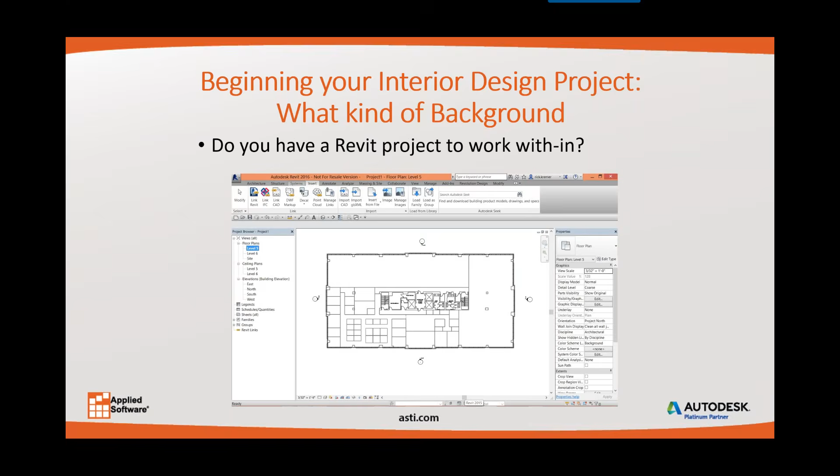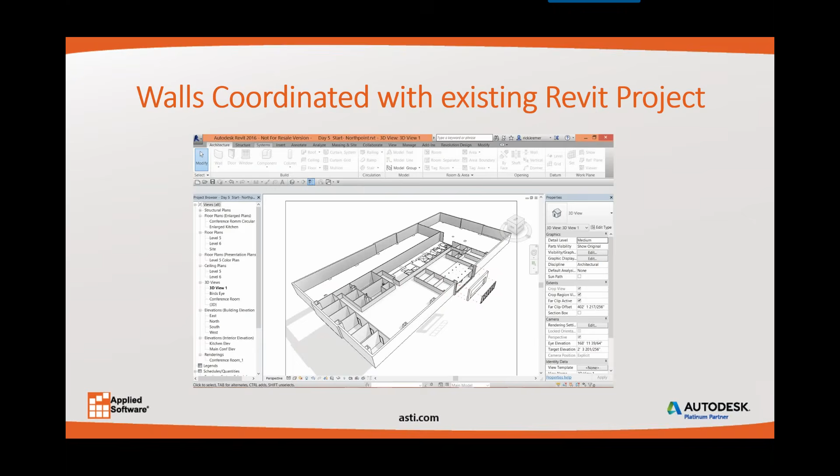So the first thing that always comes to mind when I teach this class is, do we really need to do everything in Revit the first project? And I'm going to say no. You can begin your project work by working in different options. In this case, what kind of background do you have? Do you have an AutoCAD background, or a Revit file? If you're using a Revit file, you're going to have the greatest flexibility on designing. If you're working with Revit files, your drawings will already be well coordinated using those existing Revit projects.

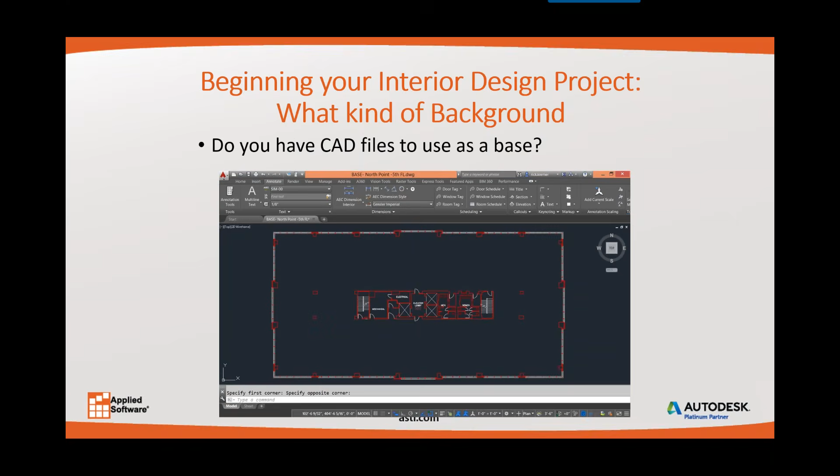Now, if you have AutoCAD files to use as a base, you can simply look at, for example, this AutoCAD background that we've received, and this is actually the file that we look at in our class. So what we start to do is begin to trace over the CAD file. Now this is really, really quick. What we do is we use the pick line tool within walls to import that line work into Revit walls.

So on the left-hand side you see the stairwell, and all we did is just use the pick lines. That has to be hands down my most favorite feature in Revit when we're converting CAD files to Revit. And the results are on the right.

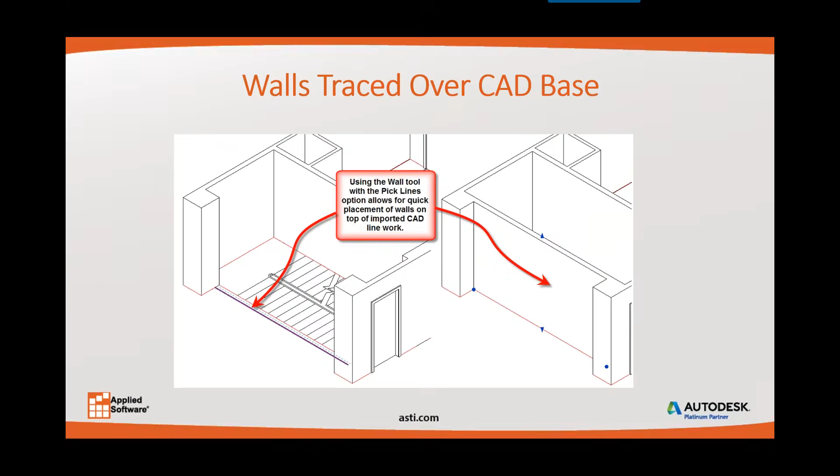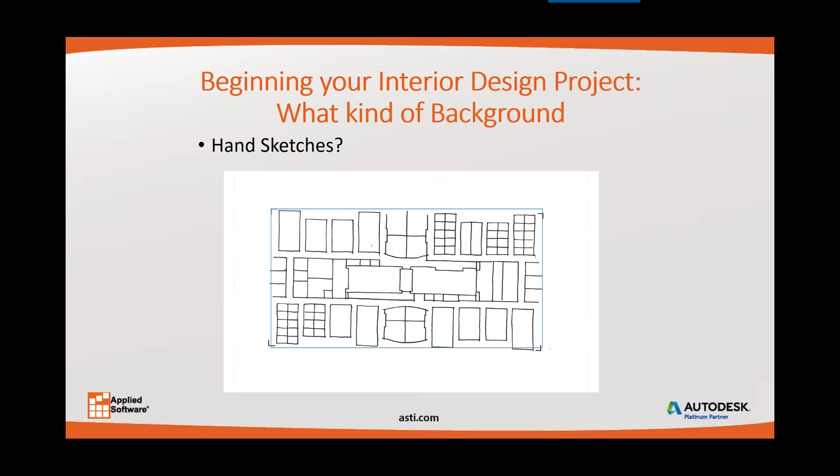Next is, what happens if we get a background that's a hand sketch? For example, this PDF over here is sketched in. Well, one of the things that we can do is we can import these into Revit. And all of these things are topics that I specifically go over in the class and showing you how to use.

Now, how much do we currently model? The question you have to ask yourself is, what do we need to model? Do we need to visualize it? Do we need to quantify it? And how much information in CAD can be just left as is? And what I call that is either leave it in 2D or 2.5D. There's sometimes the difference between 2D and 3D, and in the middle is 2.5D. And you'll have to take my class to find out what that 2.5D is.

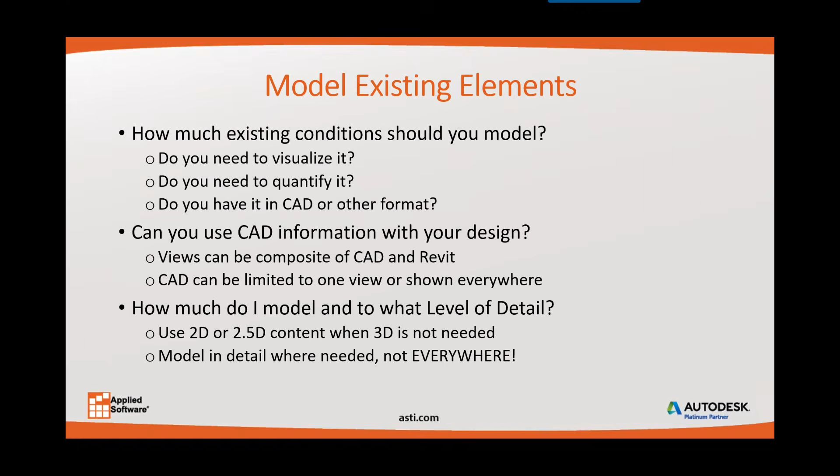An example of this kind of fusion between AutoCAD and Revit and modeling. You'll notice on the outside perimeter of this wall we have the core and shell. The outside is AutoCAD line work. I don't need to draw the outside core and shell, in this case the shell part, because I'm the interior designer. I don't need to be worried or design anything around the curtain wall system on the shell. I'm more interested in the interior.

In this case I've gone ahead and left the AutoCAD as is. I've built up the walls around the core by using pick lines. You'll see that right all the way in the bottom left. And then the new walls and furniture are modeled using Revit. And it's really, really quick and easy.

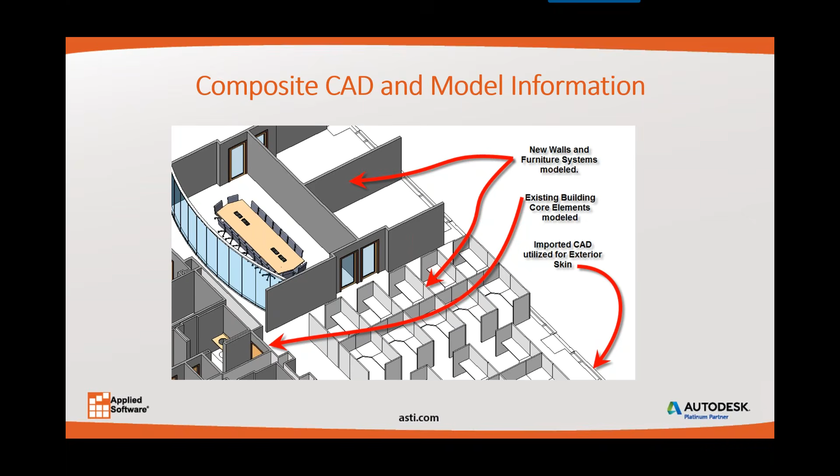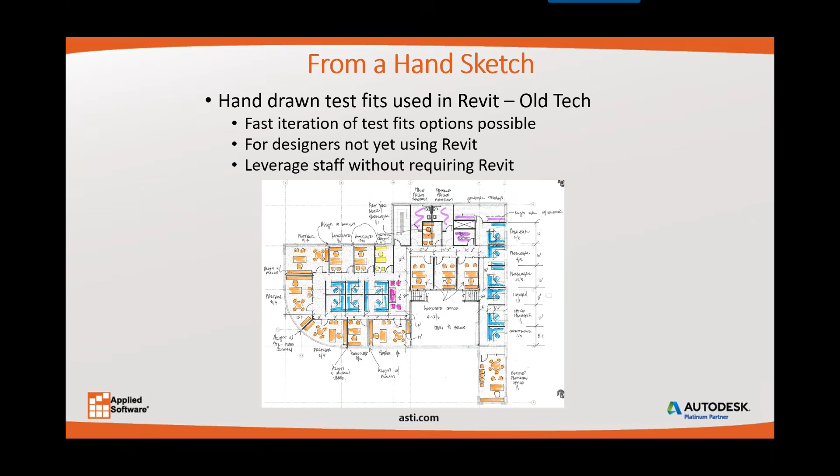Now, the next thing I can also do is take a look at how to do this from a hand sketch. When I do this from a hand sketch, a lot of times what I can do is I can take a hand sketch. In this case, we exported out the Revit to a DWG or a PDF, and a designer came in and hand marked this up. We can then bring that information back into Revit and start to translate that.

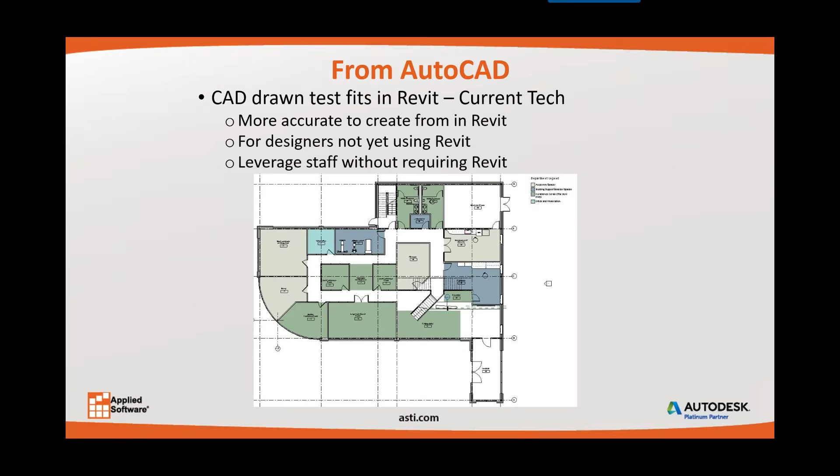We can bring it into AutoCAD like we would normally and use fill patterns or hatch patterns. And if we use Revit, we can take it to the next level. Take a look carefully. I'm actually using the actual patterns for carpet and for tile in different areas. The nice thing about this is that I can easily do area calculations that are dynamic and are 100% right on. This also gives me the ability to do a lot more presentations with the actual material and include it in my color board.

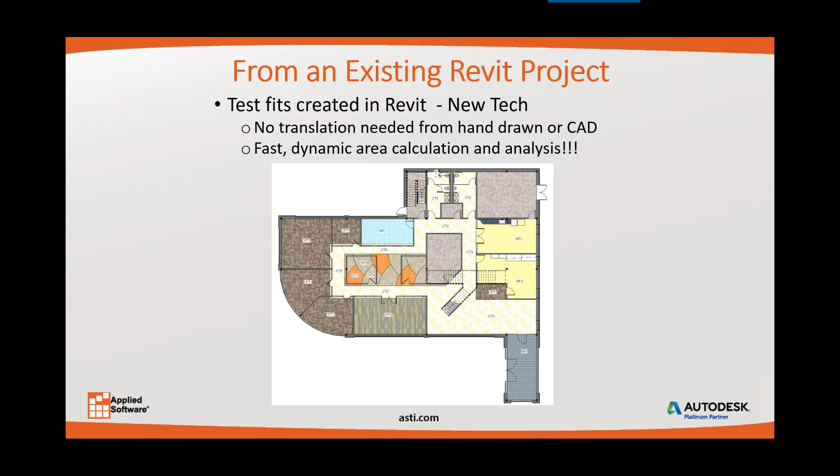I got to tell you folks, super, super excited about this class. I love teaching it. When we take this type of information from a CAD file and Revit file, we can basically layer or stack the layer of information. So in one drawing, for those of you who aren't using Revit, you have all of this information or layering of information in one file.

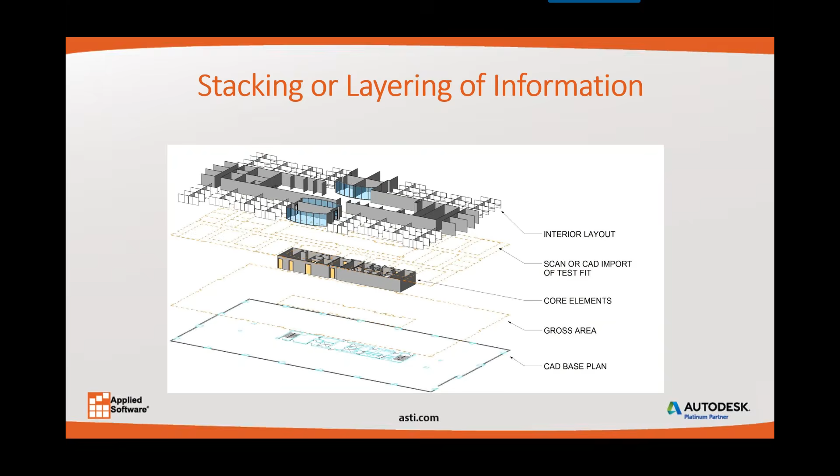We have the CAD background. We can get a gross area calculation. We can look at just the core. We can bring in scans and look at test fits. And then finally the interior layout. So the things that we can derive from that is gross and rentable area calculations based on BOMA, which is wonderful. And it does it right out of the box, does BOMA calculations.

We can look at area programs and basically start to look at values that we can place in to do smart computations. And that includes some area analysis in the room schedules. Over here, we have a room schedule that we'll generate in the class that basically we go through and we start to do this square footage calculation for the entire program. And we put in a new parameter of what is the program area requirement for that space. And that's typically something that we get during the process of acquiring the project.

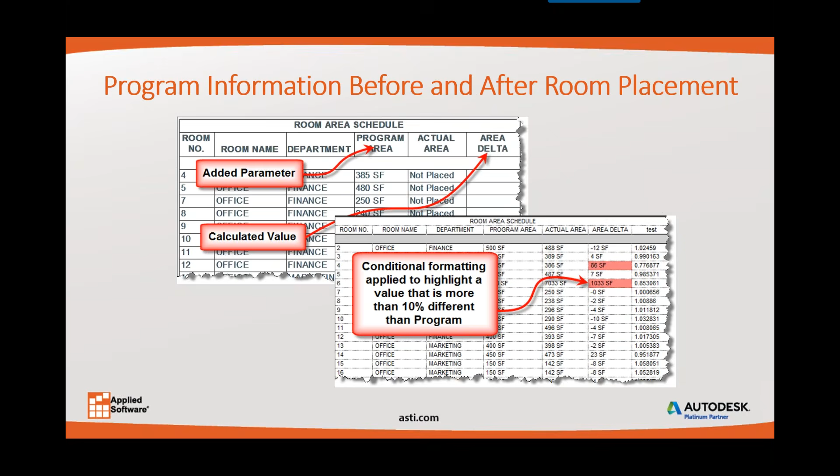We can easily create an area delta and it'll highlight it in red automatically to show you which areas do not meet the minimum square footage. Either they're below or over. So we can find out quite easily and dynamically any of the program areas that bust our program.

Presentation graphics. Revit by far has one of the best presentation graphics that allows us to do color schemes and shadows and 3D cutaways, perspectives and walkthroughs, and then something else as well. Some examples of this are, for example, we can do these 3D elevations to generate wall patterns to give different options to clients. We can do 3D presentations of floor plans with colors, and this is really, really nice and easy. We can also look at those in isometric because a lot of times two-dimensional line work just doesn't convey that information.

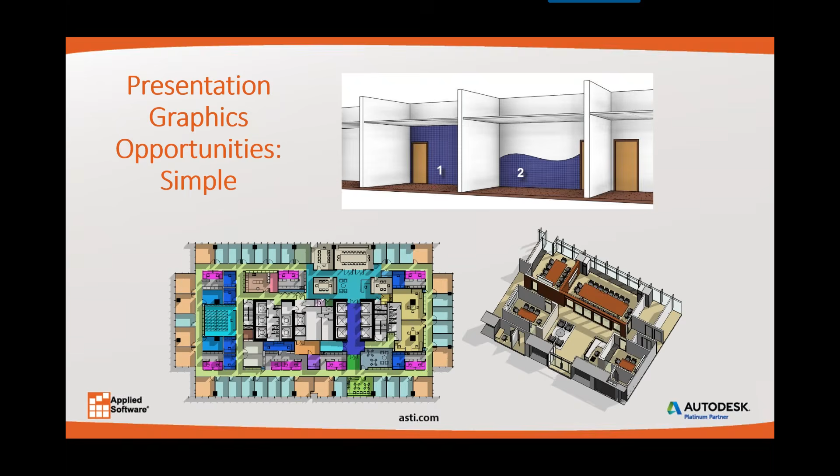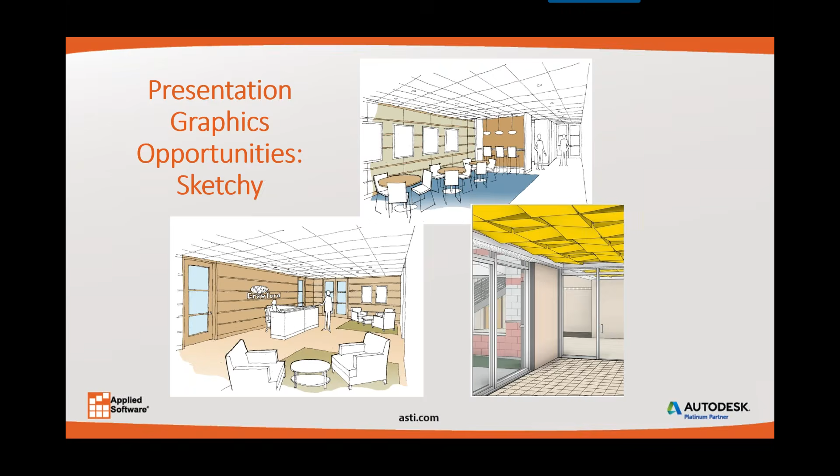We also have the ability to do sketches. A lot of times clients understand sketches as something that's not hard-lined. These sketches are generated from Revit. The colors are actually just taken in Pantone with a marker. So the top left and upper top one is done by hand, and the one on the bottom right is 100% Revit right out of the presentation from the camera. You have the ability to create these sketchy lines so you can convey information without really dedicating to a material, to convey the sense of space without marrying to a color or material.

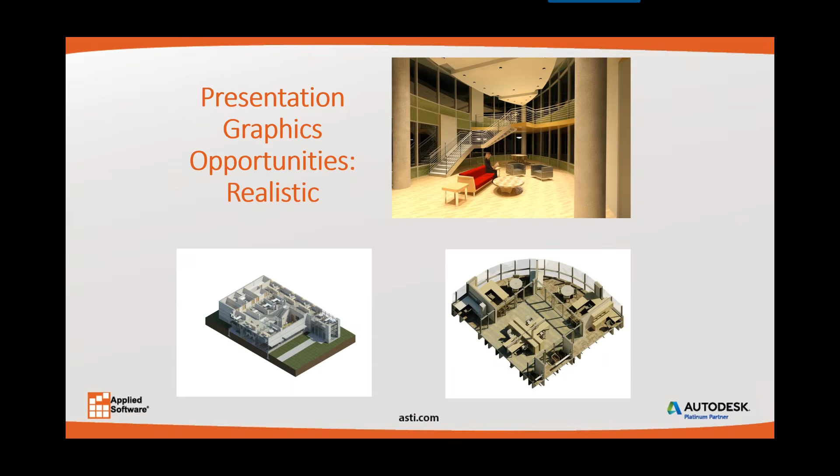Or if you decide to take it to the next level, we can do renderings all within Revit. And you don't have to take it to 3D Studio Max. You can get these types of realistic renderings. We can take a look at the overall building, or we can just take a look at a particular space. This particular 3D view gives us the ability to convey information and a sense of scale to our clients.

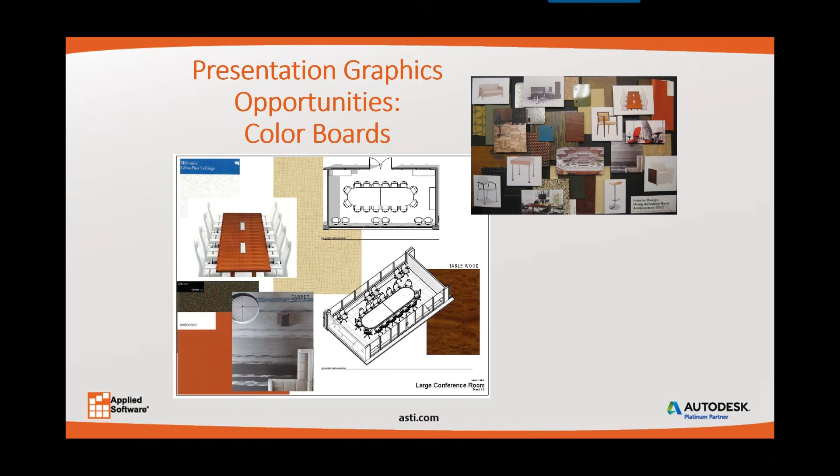Now, we can also incorporate these into our color boards. Everyday color boards that we use can now incorporate three-dimensional imagery and real materials like they would traditionally when you do your color boards. Now we can take our color boards to the next level and introduce Revit objects as part of our color boards.

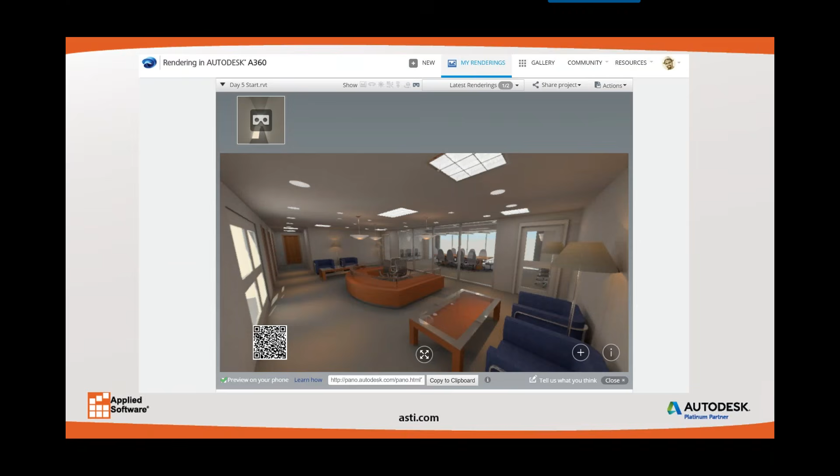When you create this panoramic on your computer, and by the way, it doesn't really cost you any extra credits to create these 3D panoramics. On your computer, you create this image. You notice the QR code on the bottom left. You can take any smartphone, scan that QR code, and it'll create that 3D image, and then you pop it into some Google goggles or these $30 goggles that I just got on Amazon. Yep, that's a picture of me, and you go, wow.

You can take these images, put them into these goggles for only about $30 and basically visualize the space in 3D. It really immerses yourself into the three-dimensional space. This is something that we go over in the class, and I got to tell you, this by far is one of the best presentation tools that you can give to your clients.

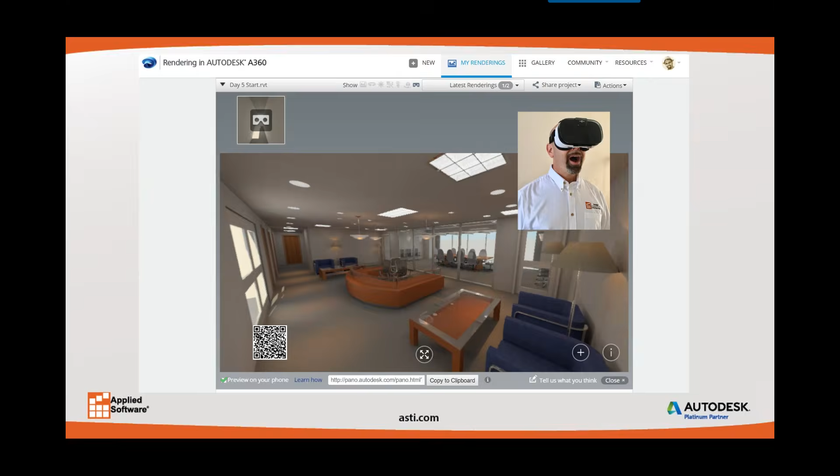Next, let's talk about room finish schedules and schedule keys. You have the ability to do smart schedules. For those of you who are working in AutoCAD, you know the tedious process of creating those schedules. You always have to go back and create the polylines and do the square footage, and if something changes, you have to adjust the polylines. In Revit, it does it automatically. You can create these room finish schedules and put in as much or as little information as you want. You can add parameters for assigning more finishes and basically customize this as you like.

What this looks like is just like a regular room finish schedule. We can also apply something called a schedule key. What this does, it gives you the ability to quickly add, I call these palettes, to different areas. So for example, palette A might be everything that is back of house, and those back of house get certain finishes. Then the CEO palette B might get a different type of finish. Every type of palette allows you to just select that style or that key name, and basically it applies it to the entire floor, base, wall, ceiling finish. And it gives you the ability to quickly create these schedules 100% accurately by creating these styles per room.

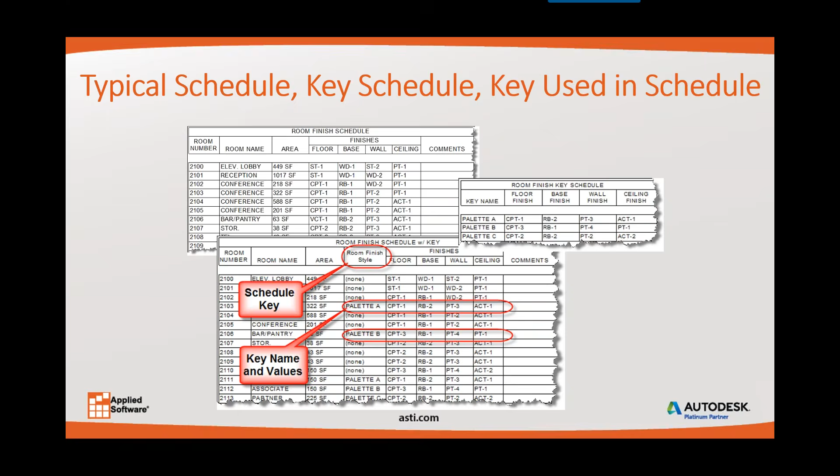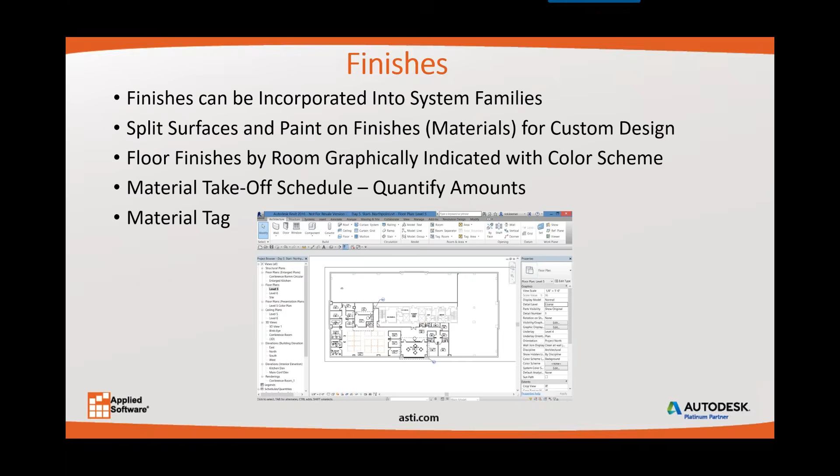Okay. Talking about finishes. The finishes can be incorporated into system families, so you can share them with other projects. You can also split the finishes on particular objects. You can create floor finishes and do material takeoffs, and lastly, you can actually tag them in a very smart manner. And what this looks like is something like this.

On the left-hand side, these are actually two very similar spaces. On the left-hand side, I did something called split face, where I can just paint the surface of the wall. So as an interior designer, I don't necessarily have the luxury sometimes of placing the chipboard wall where I want, but I'm left with the architect's stud and chipboard wall. I can then go after the fact and paint materials on them, such as WD2 and CT1. Or I can model it on top of the walls and have it all be a certain finish.

All of this information, as you see on the bottom left-hand side, is live. That office view looking to the left and to the right is live, and I see the results immediately. Any changes to those finishes show up in my schedule, which you see on the bottom right. What's really nice about this is it's 100% accurate, and I never have to redraw anything.

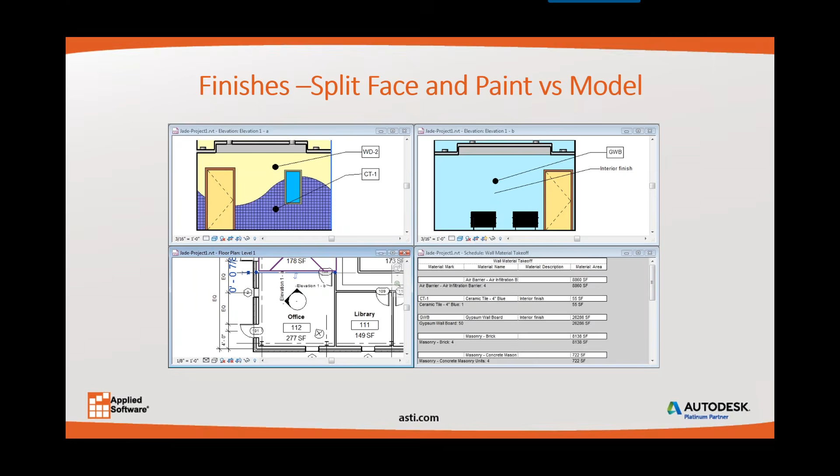Next, let's talk about design options. Our design options in Revit are not for completely different designs. They're usually something that has designs within our, let's say, four walls. And it's great for exploring options of a particular area, such as furniture layouts or alternate floor plan areas. But typically it leaves the core and the shell alone. You can display desired options and incorporate other types of design options for different phases.

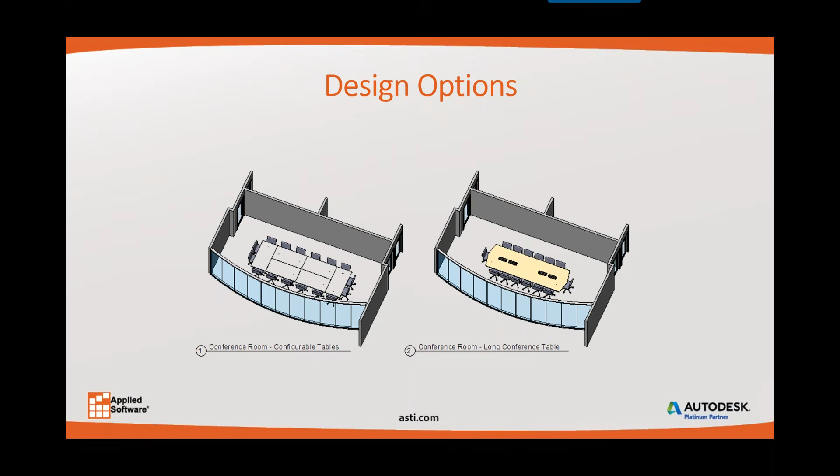In this case, you'll notice a simple version of design options might be just as simple as something showing a conference room with configurable tables or one long conference table. Now this is just a super simple example, but the idea here is that we don't have to have a separate Revit file. These are called design options, and they can be as simple or as complicated as need be.

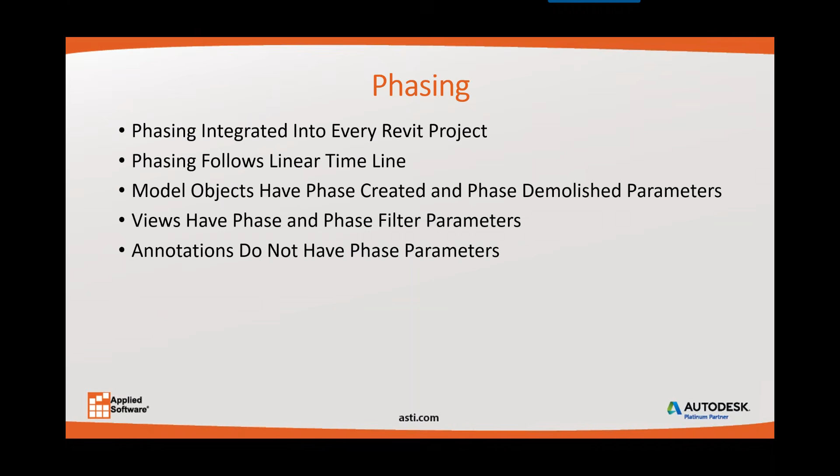Next, we have phasing. Phasing is built into every Revit project. What I mean is that it follows a linear time, and modeled objects always have a phase that they're created and possibly a phase that they're demolished. You can increase that by looking at views and applying those phase filters on those parameters and on those views. By the way, annotations do not have phase filters, so when you're working in Revit, keep that in mind. Annotations basically live all the time. This is great for renovation and addition work, and also good for simple construction phasing.